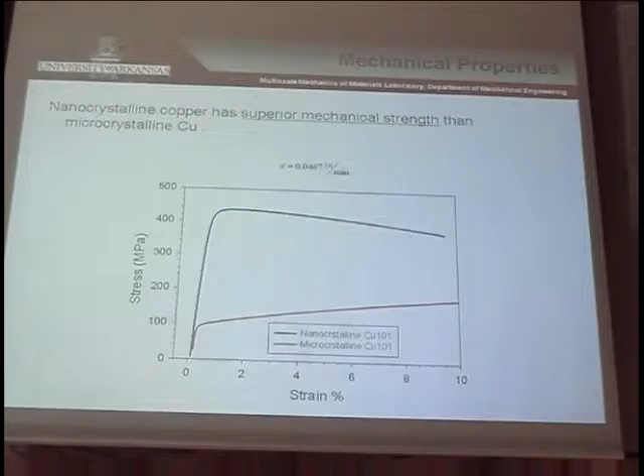There are lots of collaborators I need to acknowledge. I'll touch on work done by four PhD students, Dr. Rahul Rajkarya, Paul Willett, and Shubhra Bansal, plus an undergraduate student, Cody Jackson, and another PhD student, Salvi Ko. I also have faculty colleagues: Ted Hartwig from Texas A&M University, who made some of the material I'll present properties from, and Doug Spirot from the University of Arkansas, who did some of the molecular dynamic simulations we use to study these material properties. We have a very good team of people I've worked with for several years, and I have the pleasure of presenting results from those studies, which resulted in four PhD theses.

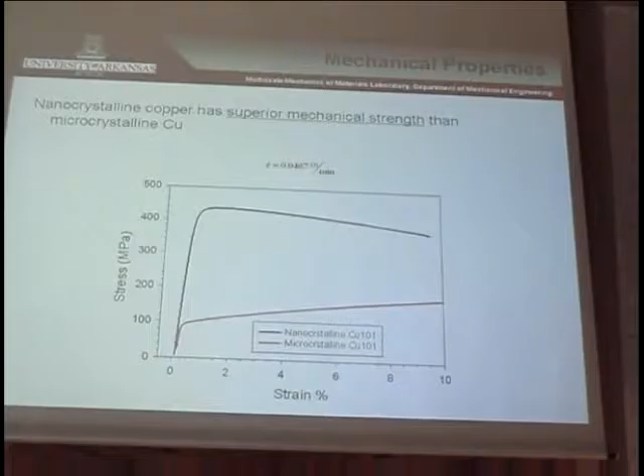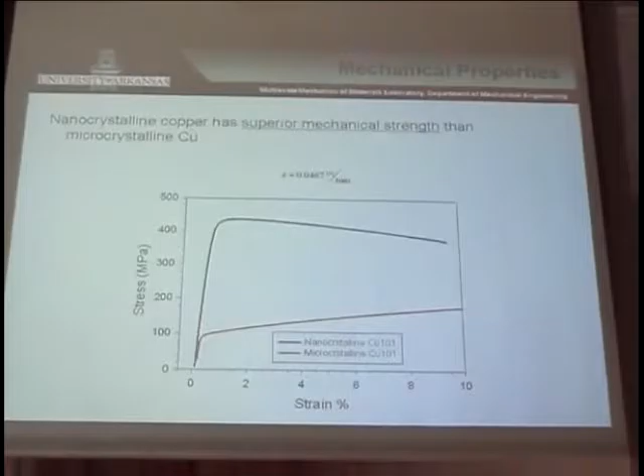Just a quick overview: when you take metals and keep shrinking the grain size, these materials become stronger and stronger. Here is the stress strain behavior of what I call microcrystalline copper, which has grain sizes of about 10 to 35 microns, whereas nanocrystalline copper, the top curve, has a grain size of about 50 to 200 nanometers.

The reason there's such a huge range is that it's very difficult to measure the grain size in the interior. You can use X-ray techniques, but they give you a number smaller than the actual grain size. If you measure grain size on the surface, the grains tend to grow as they come toward the surface, so you pick larger grain sizes. That's why I'm giving a range of about 50 to 250 nanometers as the average grain size.

You can see the tensile strength of copper has gone up from something like 90 megapascals to about 430 megapascals, about 4.5 times increase in strength. Also, on the strain side, it still has plenty of ductility. You get necking very quickly, but then lots of plastic deformation before the specimen actually fractures.

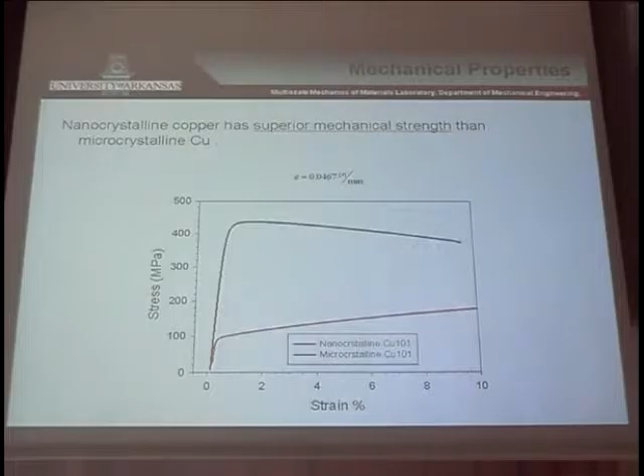So here we are trying to develop copper as a structural material, and I will give you the reason why it is important as a structural material, without losing its electrical characteristics very significantly. So the applications we are talking about are mostly electrical applications.

The electrical applications are what we call interconnects. These are the three pillars you see in the top right corner of this slide, and they are very small. In fact, the spacing between pillars can be as little as about 25 micrometers for interconnects of the future. They are subjected to temperature variation during manufacturing as well as during normal usage.

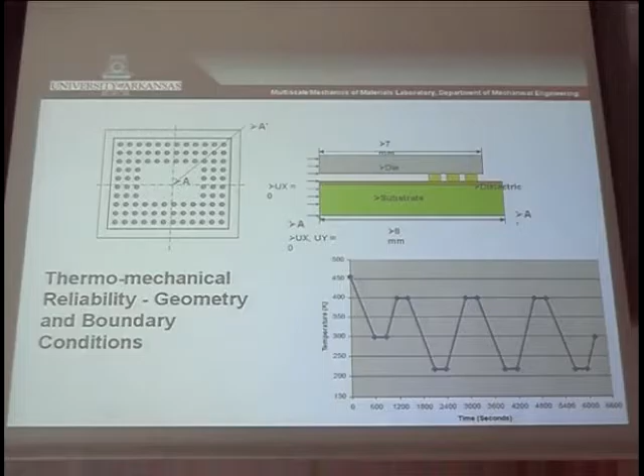So the temperatures can fluctuate, and since you're all stress analysts, you know that can generate thermal stresses that are quite large. If you take one of these designs and subject them to different temperature variation, as shown in the figure, you'll see that the stresses can vary quite a bit.

As the pitch shrinks or decreases, the required strength from copper is going to be larger and larger. This work was sponsored by the Packaging Research Center at Georgia Tech, and before going to University of Arkansas, I used to be a professor there. We had this combined project trying to develop interconnects from copper of higher strength.

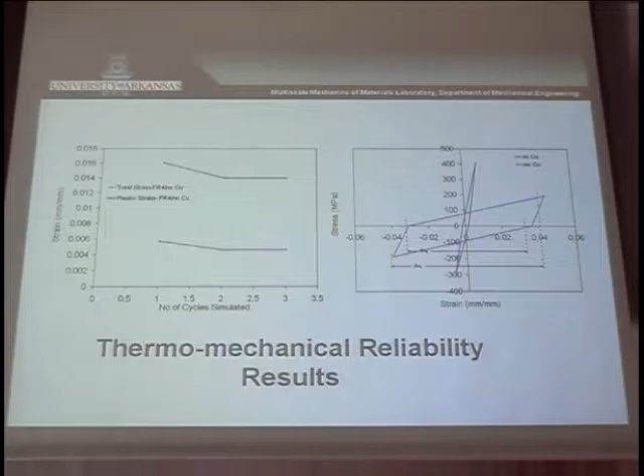Now the most important aspect of this work is durability. Initially it looks very good, but the next question somebody will ask is, what is the durability? Is this material going to continue to perform as it's supposed to during several years of service? It cannot degrade in properties, and that is where most of our work is actually directed—toward durability.

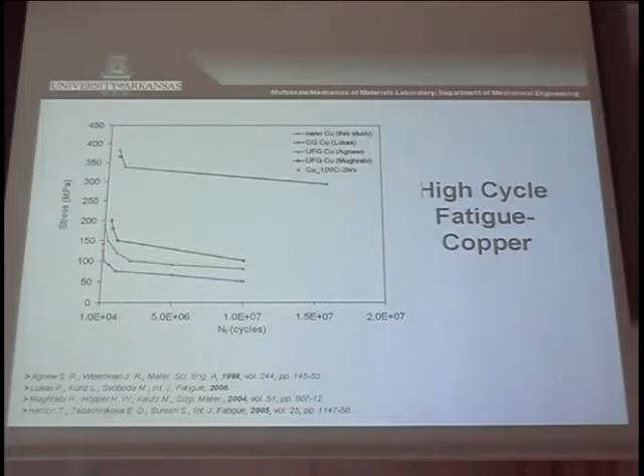So I look at high cycle fatigue of copper, compare it to microcrystalline copper from studies, and we can see that the high cycle fatigue properties are very attractive. That continues to pique our interest in something like this.

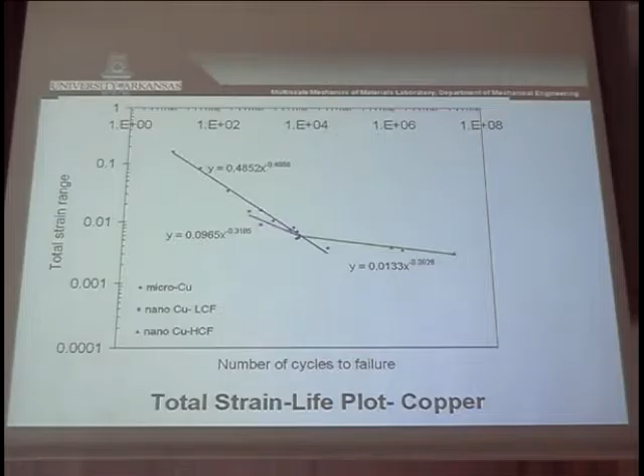So you can understand that we do have applications in the electronic industry as the primary driving force for this study, but we are also trying to understand the different phenomena. This material is a fascinating model material for understanding basic phenomena.

I think we are perhaps the first in the world to do fatigue crack growth work on nanocrystalline bulk materials. People have done work on thin foils and small samples that are very difficult to grab, and the properties you measure consequently are not reliable. In this case, we were able to make samples that were big enough—small in comparison to normal fracture mechanics tests we perform in the laboratory, but still fairly reasonable in size, so we are sure of the properties we get.

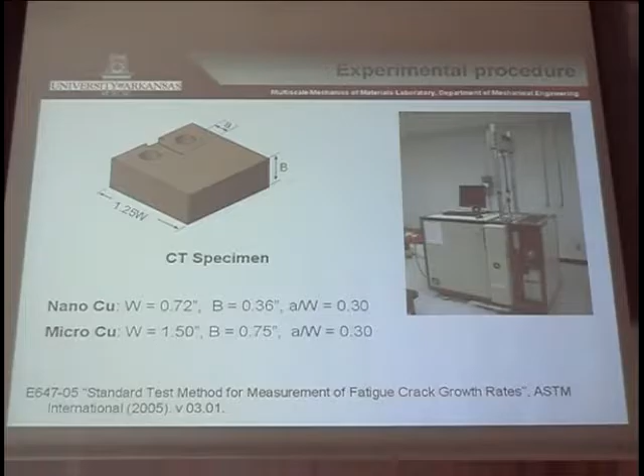For example, for nanocrystalline copper, we were able to use a width of about 0.72 inches or so, about 2 centimeters wide. That's not a very large specimen, but it's not a small micro-sized specimen either. On the right-hand side, you see a picture of a very small servo-hydraulic test frame that we have used for our studies.

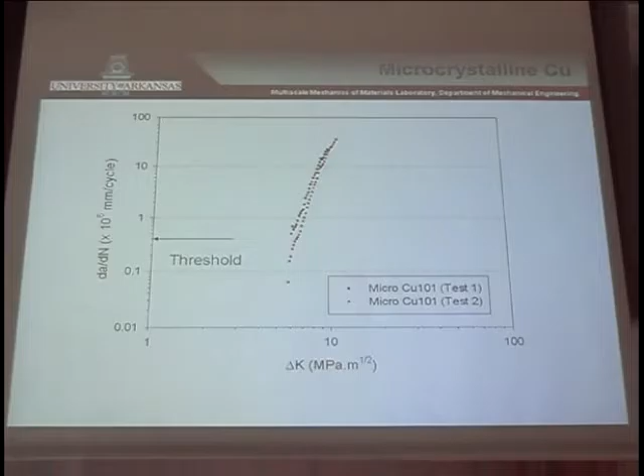We have done some fatigue crack growth work, and what you see here is the wide range fatigue crack growth behavior for microcrystalline copper. We take the same nanocrystal material, grow the grains until they become microcrystalline, and then test them. This serves as a reference for the properties of the nanocrystal materials. We did two tests and got very repeatable results. Nothing spectacular here other than this is our reference material.

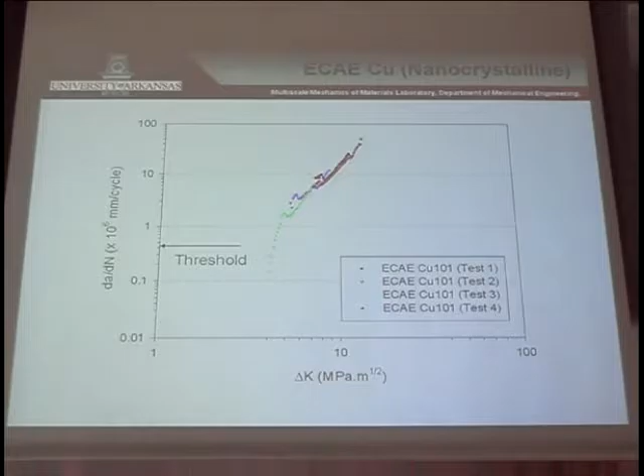We did the same thing with nanocrystal materials, and you can see there is a lot of repeatability in our tests, so this is good news. When we test about 4 different samples, we get very similar properties. So our test procedures are validated using these specimens, and then we put them together.

The microcrystalline copper results are in blue, and the nanocrystalline copper materials are in pink. You can see there is very clearly a crossover, and it turns out in the literature, depending on the range of the fatigue crack growth rate, you can claim nanocrystal materials are a lot better, or you can claim they are not so good. So depending on the range you test in, you'll make very different claims.

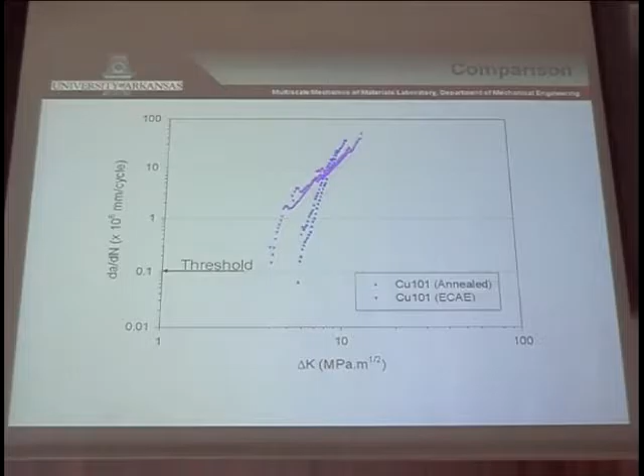In the high crack growth rate regime, which is actually of interest in the application we are talking about, we see clearly that the nanocrystal materials have an advantage. But in the threshold region, or slower crack growth rate region, it is the opposite.

Another concern we had was stability — over a long term, does the material remain the same? I'm not going to talk about the work we've done on nickel because I'm going to focus on copper, and I didn't know exactly how to get the right-hand side of the figure onto the screen. So let's focus on the figure on copper, which is at 100 degrees C.

This temperature is boiling water temperature. We did simple creep tests at different stress levels, ranging from 225 MPa to about 294 MPa, and we were surprised at how quickly this material was creeping.

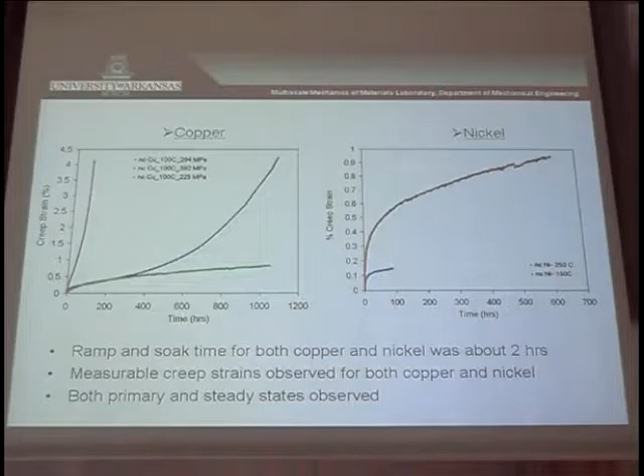Normally, copper at 100 degrees C doesn't creep like that. If you take microcrystalline copper, you'd have to go to temperatures in excess of 350 C before you get this type of creep behavior. That was alarming — on one hand you have a very strong material, but with time, you have to be very concerned about its durability and its ability to retain strength.

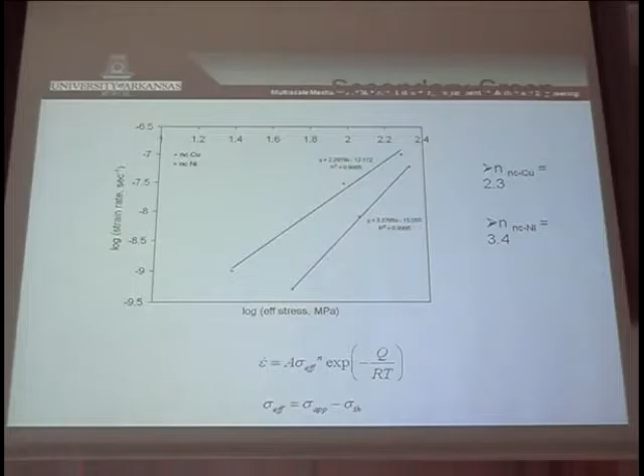So we plotted creep curves, and sure enough, we saw a huge difference between the creep curves for nanocrystalline materials, and we measured secondary creep behavior in the case of nanocrystalline materials. The nickel nanocrystalline materials were a little bit better because the recrystallization temperature for nanocrystalline nickel is higher than that of copper, so we can see that phenomenon.

Here also, at 100 degrees C, nickel barely creeps, whereas in the case of nanocrystalline copper, the creep rates are much, much higher.

So we looked at the fracture surfaces of these creep samples, and we find that the void size — the creep voids that contribute to the creep rupture behavior — are quite large. So there must be something happening that tends to grow the grains in the case of nanocrystalline copper while it is creeping. Very clearly, we reached the conclusion that the grains are actually growing.

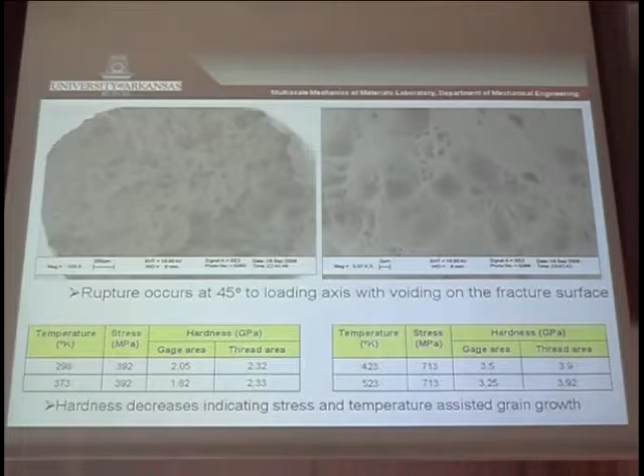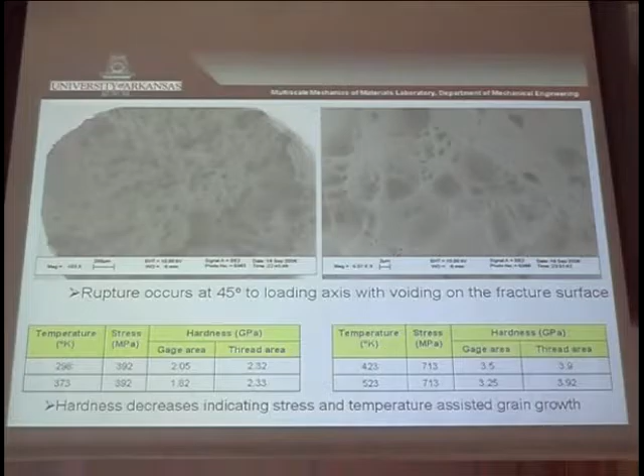So even at 100 degrees centigrade the grains grow. Typical semiconductor applications can have temperatures up to about 85 degrees C in normal operation, and can go even up to about 200 degrees C for short periods during manufacturing. So pure nanocrystalline copper would not be able to endure these temperatures, and we would not be able to guarantee the reliability of that material.

So then there was a student who studied the main impediments to durability of nanostructures in copper, in this case.

So we observed that we have grain growth due to exposure to temperature and time. And we also have what we call grain boundary sliding, which gives rise to what is called the inverse Hall-Petch relationship. It gives rise to creep at low temperatures, and it gives rise to stress-assisted grain rotation and coalescence that actually causes those grain sizes to increase.

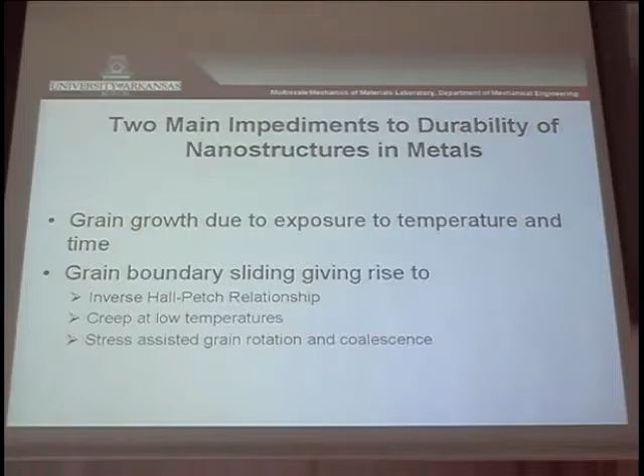So it is not just thermally activated, it is both thermal and stress activated. Both higher temperatures and stress can contribute to the grain growth and to the lack of durability in these materials.

So we came up with this idea that perhaps we ought to use dopants. What do you do with these materials to try to regain or maintain their properties under service conditions? So we use dopants for stabilizing these nanostructured materials.

The first thing we need is an element that has a tendency to naturally segregate to the grain boundaries. It should be something that is not soluble in the matrix, but tends to segregate itself to the grain boundaries very quickly.

That element will pin the grain boundary at its point, and we should be able to improve the durability or resistance to grain growth. So the concentration of dopants should be sufficient to effectively pin the grain boundaries to prevent migration and sliding, but not cause loss in grain boundary cohesive strength, leading to low energy intergranular fracture.

So those are the two competing things. If you put too many of these dopants, you're likely to initiate fracture of the grain boundaries because the cohesive strength of the grain boundary will go down.

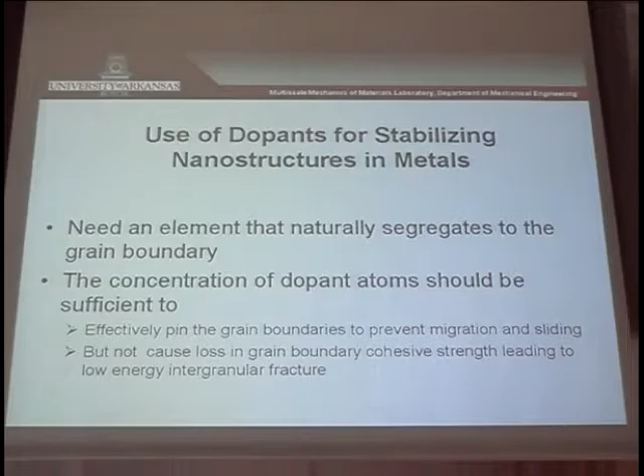In some ways you can see this is a great research problem. It can give you a lot of job security because you can work on it for a number of years trying to perfect it. But that's not the case - we have funding agencies in the United States that have a very small vision, a very short-term vision. So if you tell them it's going to take you 10 years to solve a problem, they don't give you the money. You have to solve the problem within that period of time.

So to shrink the time involved in solving the problem, I sought help from people who do molecular dynamics. I posed a very simple problem to them: take a bicrystal of copper, so you have one grain boundary, and that grain boundary is normal to the axis of the stress. Why don't you dope that with a few atoms of antimony and look at the free energy of the grain boundary itself?

So they did a thought experiment in which they took atoms of different sizes. Delta R here is a parameter which is the ratio of the dopant to host atomic radius - you take the atomic radius of the dopant and the host atom and take the ratio of that. One of them was a number like 1.6, which actually happens to be antimony.

Because doing my research into what materials will segregate naturally to the grain boundary, I found that antimony has very little solubility in copper, and all the atoms very naturally segregate to the grain boundaries. So what you see is that the grain boundary energy decreases very significantly as you increase the number of dopants per nanometer of grain boundary length.

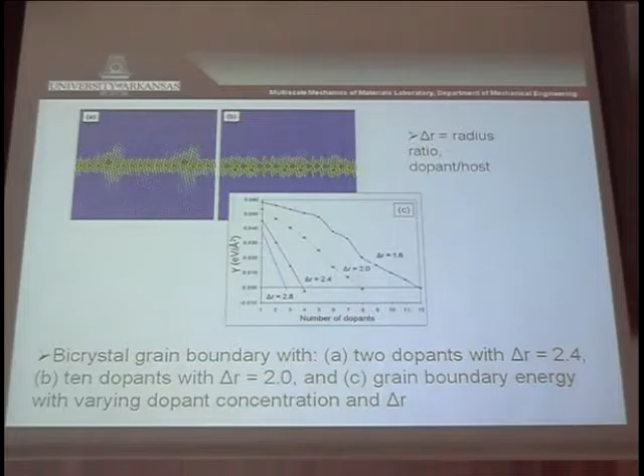So this is basically a two-dimensional problem, two grains on either side of the grain boundary, and then you can vary the number of dopants that you introduce at the grain boundary. Through molecular dynamics simulations, we proved that the grain boundary energy reduces significantly, and therefore you would get some stability. We also did experiments going from bicrystals to a number of grains.

And this is still a two-dimensional structure now, with an initial microstructure that is looking more and more like the microstructure of real copper. And we doped one of the experiments, the simulations, we put antimony in it, and in the other simulation we did not put antimony.

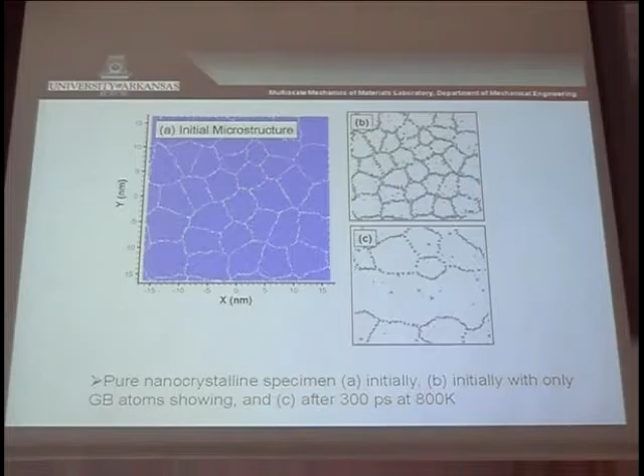So we were very encouraged by these simulations, and we used them to determine the ideal amount of antimony needed to pin the grain boundaries. That, of course, depends on the grain size itself, because as you have smaller and smaller grain sizes, you have more grain boundary area, and therefore you need more antimony to provide the durability.

So we used these simulations to actually do some experiments, and that work is continuing at this time at the University of Arkansas. We have the material, we have done some initial stability experiments, and those show very clearly that if you have even 0.2% atomic concentration of antimony, we are able to stabilize our material very significantly. The next process would be to determine the mechanical properties of those doped nanocrystalline materials.

So just to summarize, I would say that we have performed experimental studies that have confirmed that nano-grain-sized copper, 45 to 250 nanometers, have strengths that are significantly higher than their microcrystalline counterparts.

The high cycle fatigue and fatigue crack growth resistance of nanocrystalline copper is also higher than microcrystalline copper in the Paris regime, the high crack growth rate regime. Low cycle fatigue properties of nanocrystalline material are lower than microcrystalline copper, but adequate for a large number of applications.

Nanocrystalline copper loses its nanostructure when exposed to higher temperatures due to grain growth resulting from stress-assisted rotation and coalescence, and is susceptible to creep at much lower temperatures due to enhanced grain boundary sliding. So effective approaches must be found to improve durability of nanostructures, and if we're not able to identify those effective approaches, we will not be able to use copper in that way. So lots of work needs to be done.

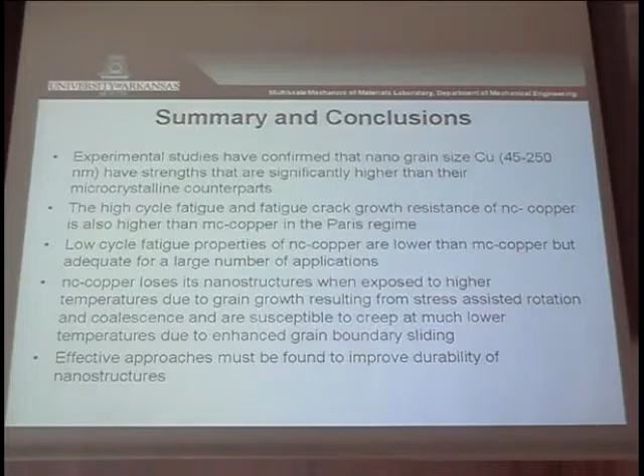There are some parameters that the electrical engineers can play with. For example, the height of those pillars is very important, and if they can go to higher strength materials, they can reduce the height of those pillars. So even if the resistivity of the copper goes up a little bit, you can still maintain the same resistance by playing a little bit with the height of those pillars.

There's also another factor, which is how do you make these things? In our studies, because we wanted to study the bulk materials, we did that by equal channel angular extrusion, a process that Ted Hartwig at Texas A&M has championed. I don't think you can make electrical components by the ECAE process, so you have to find some kind of electrochemical process to produce those nanostructures.

Then the question comes up: if you take ECAE nanocrystalline material and compare it to the properties of electrochemically processed nanocrystalline material, would there be a one-on-one comparison? So, as I said, we do have job security for some time, and we can keep studying this.

But I think the part that I did not touch on here is the scientific part. Our group has done a tremendous amount of work being able to determine the fatigue properties without doing any experiment. We have computer codes where we can subject a very small pillar, a very small specimen, to fatigue loading, and look at the nucleation of dislocations and how those dislocations can coalesce and form a crack, and how the crack continues to grow.